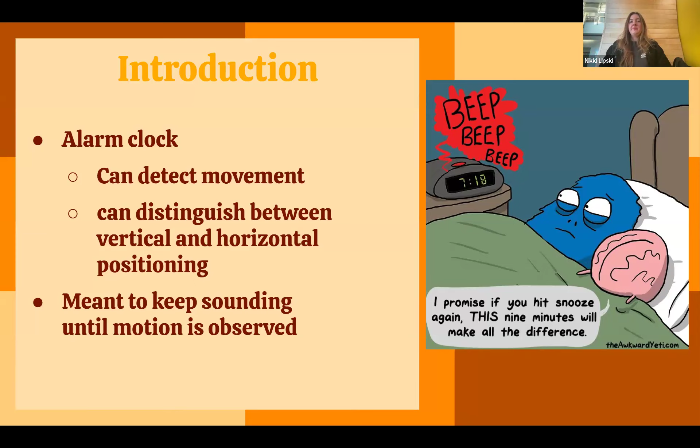So how does it work? It uses MediaPipe for point detections on your body to determine if you are in the horizontal or vertical position. There's a camera that watches you while you're sleeping to see if you are sleeping or awake.

Here's how it works after the alarm is set: you put in the duration you'd like to sleep, say a good 8 hours, so you put in 8 hours. After that time, the alarm will sound, and once it starts going, if you decide to go back to sleep, it'll be like, hey, you got 8 a.m., you gotta go. So that's how it works.

The key libraries we used for this project were MediaPipe, which detects key points of our bodies as previously mentioned; NumPy, more for the counter figuring out how long the alarm was set; Pygame for the alarm sound you heard throughout the video; and OpenCV for capturing the video of you sleeping and tracking those key points on you throughout the night.

A bit more on MediaPipe: it's a free Google AI Edge solution that tracks all the points on your body. As you saw in the video, it would track my eyes and nose and detect all parts of my body, but our main focus was the shoulders and hips so you can see if you're horizontal or vertical.

In terms of the code workflow: when the program starts, it opens the camera for live feed analysis, which feeds into the pose estimation model that estimates what position you're in. Once it detects that, it tells you whether you're horizontal or vertical, and from there the alarm sounds. If you go back to sleep, like you saw in the video, it sounds the alarm again until it detects that you're fully up.

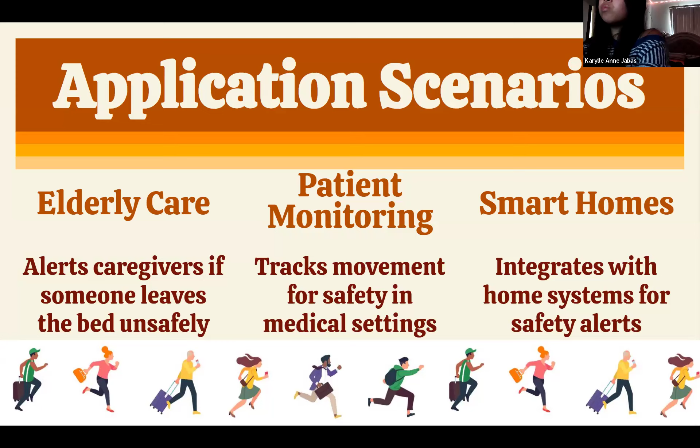Some scenarios where this would be very useful: elderly care, where if an elderly person does get up, it notifies their caregivers for safety. This would also be useful for patient monitoring to track movement, and for smart homes, integrating this for safety alerts as well.

Some limitations and future improvements: in terms of the camera, it requires proper visibility, since if it doesn't detect you properly it could mess things up. Height adjustment was also a problem. For future improvements, it would be useful to detect multiple people, not just one, and add sound or motion sensors for accuracy.

So in summary, this project is a combination of OpenCV and MediaPipe for monitoring, detecting movement and posture to tell if you're asleep or not. It's a simple and effective system.

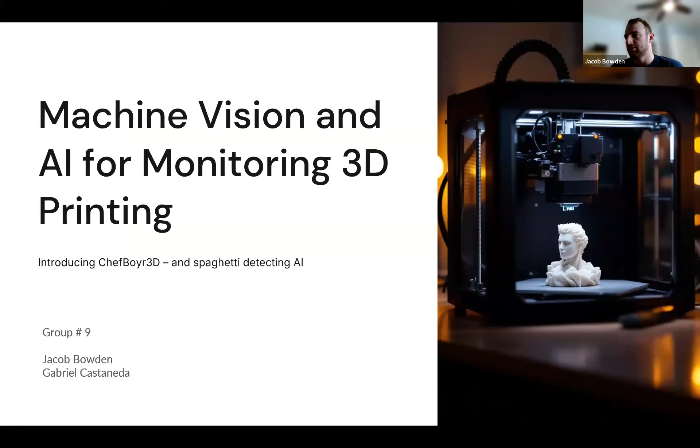My name is Jacob Bowden, and our project was machine vision for monitoring a 3D printer to stop the printer if any errors occurred. My partner was Gabriel Castaneda. So we'll go into the demo video.

Hi, my name is Jacob Bowden, and this is our machine vision project on error detection for 3D printing. We created an AI and named it ChefBoyr3D, which is a spaghetti detecting AI that monitors in real time a 3D printer and stops the 3D printer if any error occurs. So I'm going to turn it over to Gabe here, and he's going to explain exactly what spaghetti is.

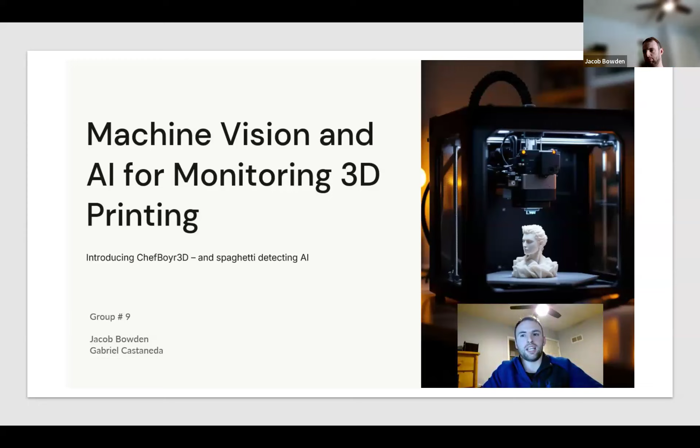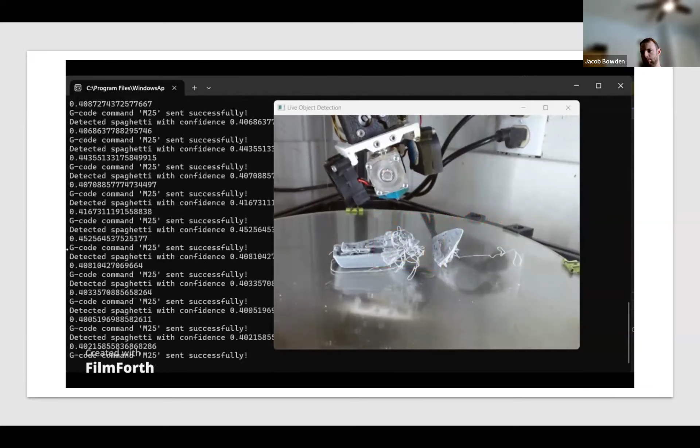Hello, my name is Gabriel, and I helped out with the AI deep learning portion of this project. As you can see in the video, there's a whole lot of spaghetti being detected from the AI algorithm. The spaghetti refers to the stringy mess of material that happens when there's a failure on the 3D printer. So when the AI detects that, it sends the G-code command M25 to the 3D printer, and that has it stop the machine.

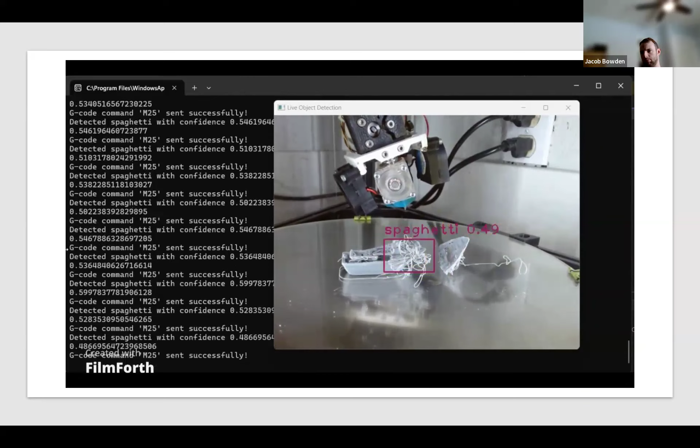Now with some terminology out of the way and your first look at how the AI operates, I want to set the scene for the motivation for the project in the first place. This is a true story, and it was the night before the project was due. I started one additional print just to get a few things ironed out.

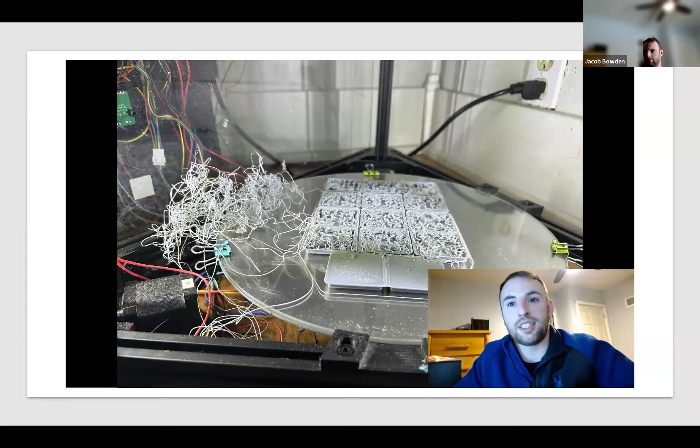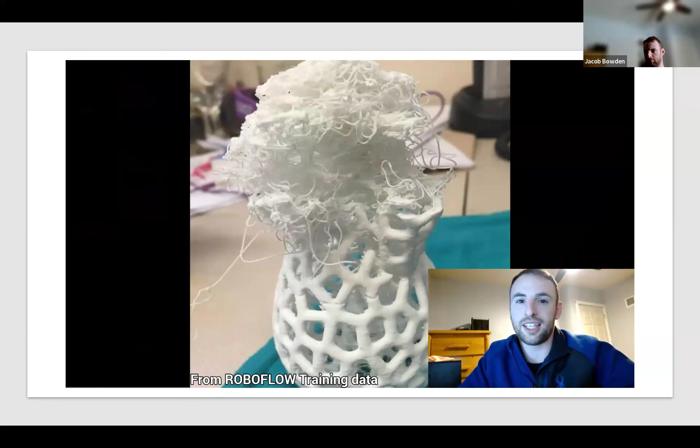As it was printing, I left for a few hours, and when I came back, my printer had been murdered. There was a big mess of spaghetti all over the print bed, and there was a strand of the spaghetti that wedged itself inside the cooling fan. If you take a look at the slide deck above, it shows the actual print that destroyed the printer that day, and the additional prints in the slide deck are from our training data set.

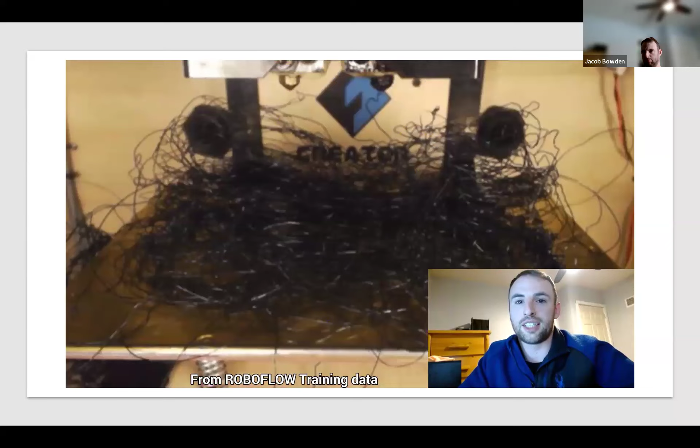To understand exactly why this failure mode is so detrimental to 3D printers, let's take a closer look at how the printer works and the print head. The section highlighted in red is considered the hot portion of the print head, and the section highlighted in blue is considered the cold portion of the print head.

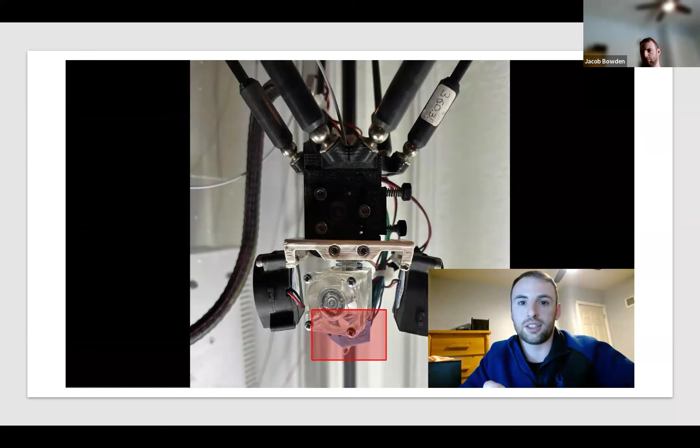When the fan stopped working, we lost cooling, and the heat from the hot section started to creep up to the cold section. If we pop off that fan and zoom in, we can see it a little more clearly. And when that heat started to creep up and heat up what was supposed to be the cold section, all the plastic inside there melted.

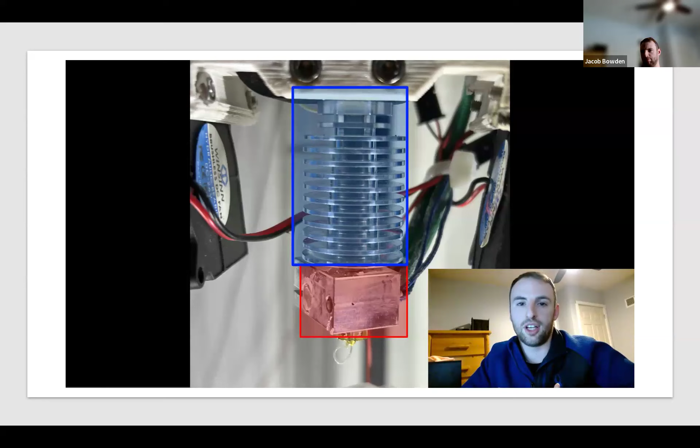Then when the print head turns off, it re-solidifies and coats all the internal mechanisms and the working gears. So we stepped back a little bit, tore the printer down, luckily had some spare parts and rebuilt it. And then we got our AI working properly, as you'll see in a moment here.

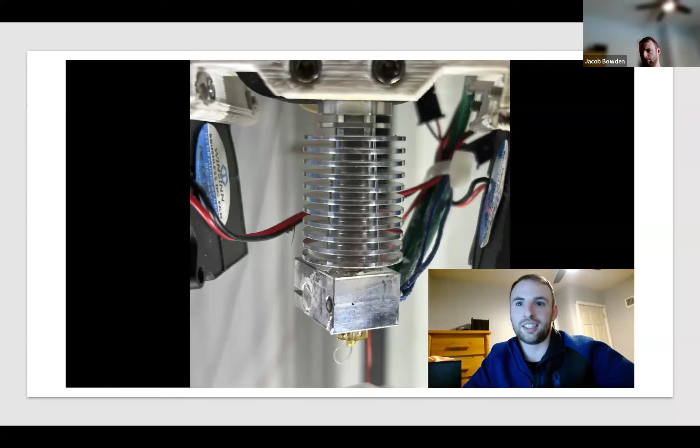This is a huge issue in the 3D printing industry, but it also has some carryover to industrial applications. As you can tell, spaghetti is definitely an unstructured and difficult to describe phenomenon, and that's where AI excels over rule-based situations. This application mimics some industrial applications perfectly, and that's another thing that drew us so closely to this project. So now, without further ado, take a look at the working AI.

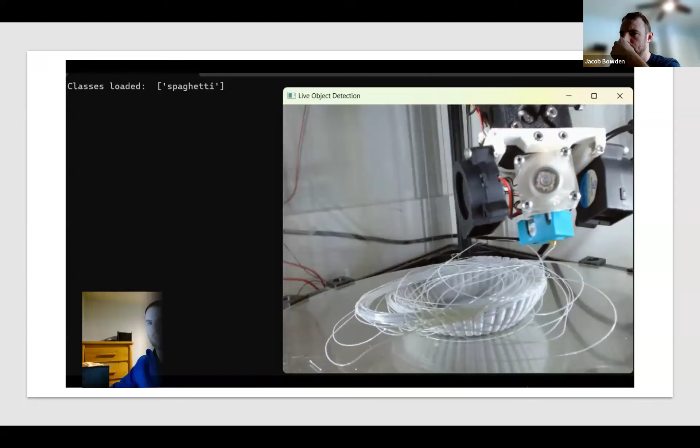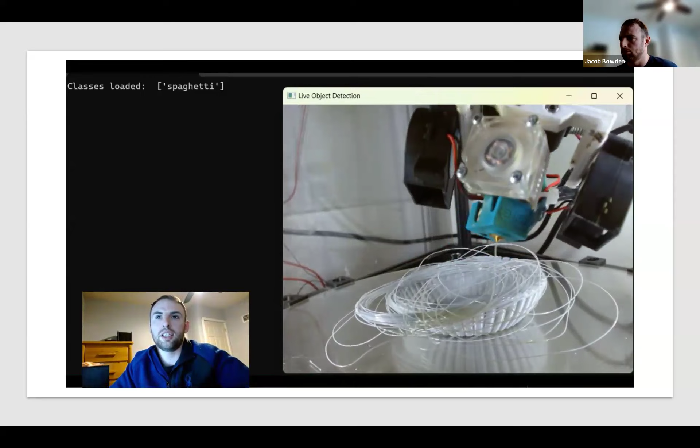For this video, we did speed it up 2x just to get to the point. But to simulate the failure mode, this is a Delta printer that's held together with ball and socket magnetic joints. So all we did was pop out one of those joints so that the motion was sporadic and its accuracy was way off. That's why you see it printing off in midair.

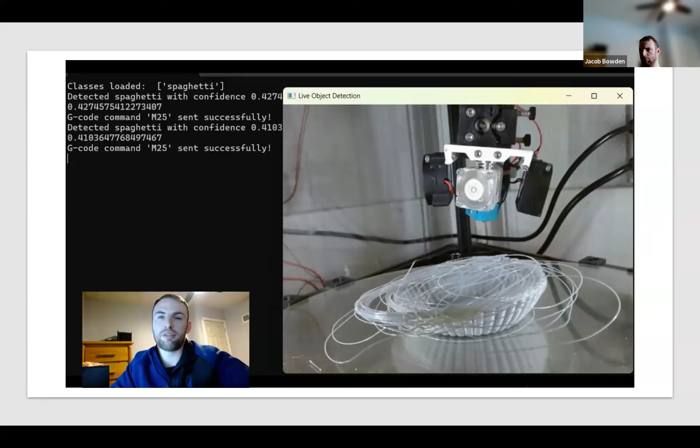Once it builds up enough spaghetti for the AI to detect it, you'll see a bounding box pop up showing the confidence level, and then the M25 command being sent over to the printer. The M25 is just an asynchronous pause, tells the printer to pause and move to the back so that the user can inspect the operation, and if it's fixable, fix it. If not, cancel the print before any damage occurs.

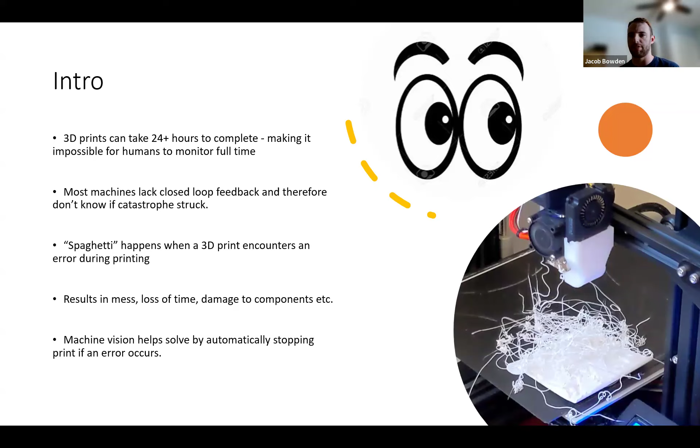So that's exactly how we simulated it, was the most common failure mode for me, and that's popping off that arm. So the machine vision obviously helps tremendously in that scenario.

In terms of the project overview, the final iteration of the project resulted in an AI that monitored the side of the print and sent a G-code command to the printer to stop it. It was sent either through a USB connection or a wireless connection. But I'd like to give a little story on exactly where this project started and how it evolved over time.

Because we actually started with the camera up top looking down at the printer. And it was a rule-based method at that point. We were taking a look at prints just like this, and we parsed through the G-code and looked for the minimum X value and the maximum X value, as well as the minimum and maximum Y value. We then created a bounding box around the print, and if the print had ever stopped or ever exited the bounding box, it was considered a failure.

Something went awry. And that worked great for these tiny little parts. But then when I tried to grab something big like this, it covered the majority of the bed. So the bounding box surrounded the bed, and pretty much anything was considered a good print. That seemed like a really easy issue to solve.

You just, instead of looking for the minimum and maximum values, look at each individual line of the G-code, create an individual bounding box, and follow that. The problem with that was we really weren't looking at the problem that we were trying to solve.

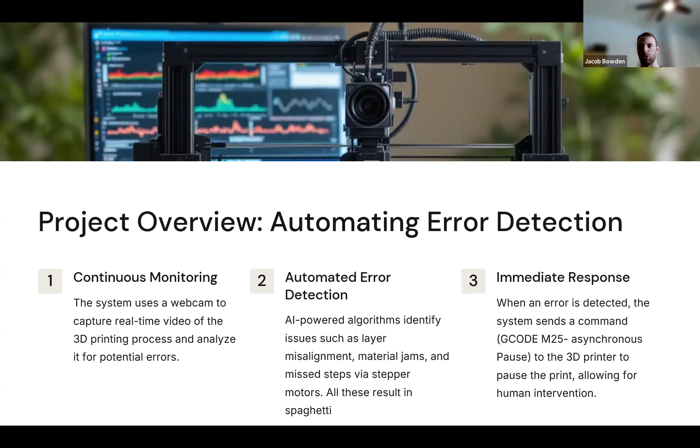It also didn't have great future applications because there are additional errors like clogged nozzles, or small missteps that can cause this error as well, that you wouldn't detect from being up top. So we pivoted a little bit, literally, and brought the camera down to the side to look at the side of the print, and we started to monitor it with AI. The reason we chose AI was because the spaghetti could be different every single time and never the same, so it was really difficult to apply a rule-based method to that.

And then Gabe can talk about the hardware setup. Yeah, so we used a Raspberry Pi 5. We found it was the simplest way to incorporate YOLO v3 into the setup. We use a standard Logitech camera through USB to connect to the Raspberry Pi, and that would send all of the data over to the 3D printer. As the communication's actually done, it can be done through UARTs or wireless through the 3D printer. Can you move to the next slide?

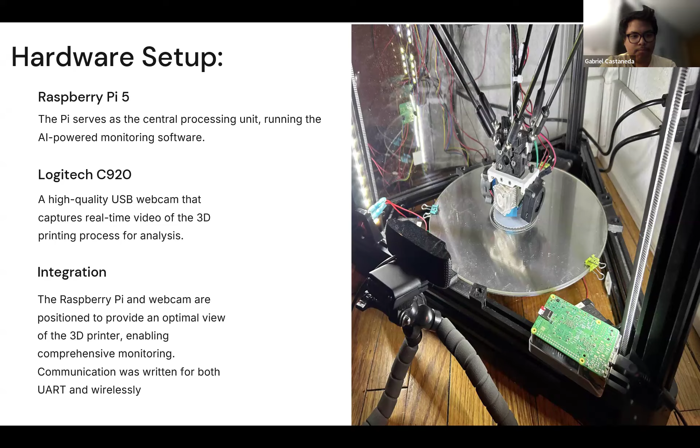So since we were only training one class, we just found it would be better to train on the cloud-based service.

The camera will send an image over to the Raspberry Pi and it'll process the image it gets. If it detects any spaghetti higher than a certain threshold, it'll send the code to stop the 3D printer. If there is no spaghetti found, it'll loop back around to the camera and keep going until the process is finished or it detects spaghetti. It'll send that G code.

M25 was mentioned by Jacob. It's pretty much just an asynchronous pause, and it sends the machine over to the back of the 3D printer until a human can fix the problem or start up the process again.

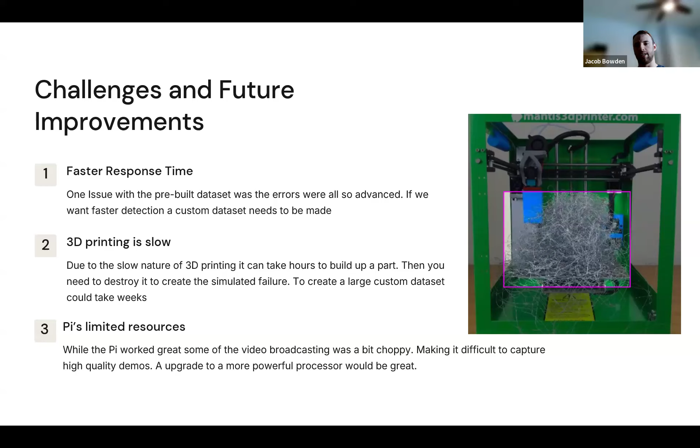And if you notice the choppy image in the one video for that demonstration, that was another big limitation with just the Pi's resources - it couldn't quite handle the video and the frame rate we were running. Gabe had mentioned to me that he's used a Jetson Nano, or has heard of one, and I think that would probably be a really good future improvement as well. But that's all.

Are there any questions or feedback you'd like to provide?

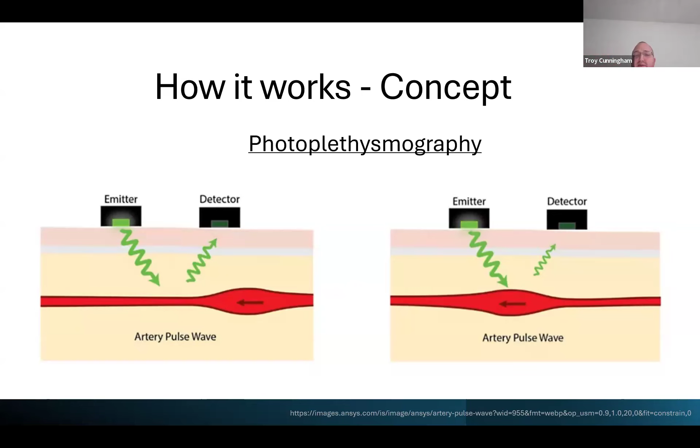From this data, heart rate can be calculated by the frequency of oscillations. Variability between heart rate can be derived from time variations between beats, and oxygen saturation can be determined by the percentage of oxygenated blood cells due to the color differential between non-oxygenated and oxygenated blood cells. Furthermore, breathing rate and blood pressure can be estimated using far more advanced algorithms that we didn't cover. Next slide, please.

The key process behind the PPG consists of 3 essential tools: Gaussian pyramids, Fourier transformations, and bandpass filters. The first step utilizes Gaussian pyramids to smooth the image and create a series of progressively smaller versions of it. This helps reduce noise while preserving important details. By focusing on features at different scales, we can highlight slight changes in light reflected off the skin, which correspond to blood flow - imagine zooming out slightly at each step to get a clear, noise-free picture of changing light patterns.

The second step utilizes Fourier transformations. This mathematical technique converts data from the time domain to the frequency domain. In this domain, we can break down the changes into individual frequencies. For example, the heartbeat frequency will appear as a distinct signal among other variations caused by motion or ambient light.

By isolating this frequency range, which is our heart rate range, we can identify the heartbeat patterns. Think of this step as breaking a song into its individual notes, so we can identify which note represents a heartbeat. For the final step, PPG utilizes a bandpass filter to refine the signal further. It acts like a strainer because it only keeps what we want, the frequencies we care about, and removes unwanted signals caused by motion or noise outside the heartbeat range. In essence, the bandpass filter ensures we focus solely on the heartbeat data, making the signal more accurate and reliable.

So in summary, the Gaussian pyramids help smooth and focus on important features of the PPG signal, reducing noise. The Fourier transformation analyzes the signal's frequencies and isolates changes corresponding to the heartbeat. And bandpass filters further refine the data, keeping only the heartbeat frequencies. By combining these advanced techniques, PPG systems can accurately measure your heart rate and other important vital signs.